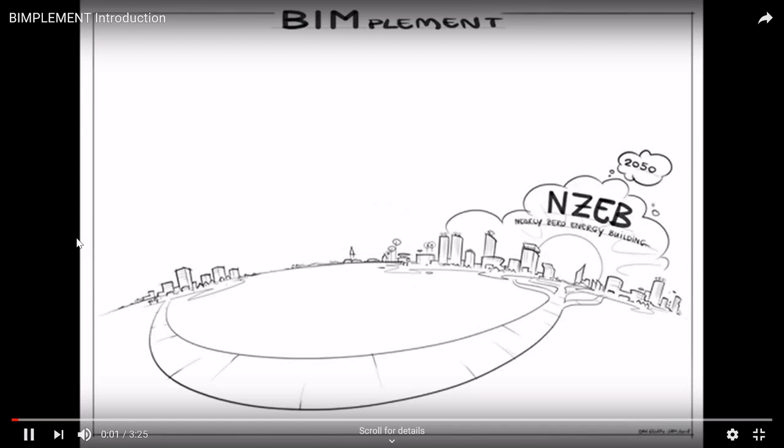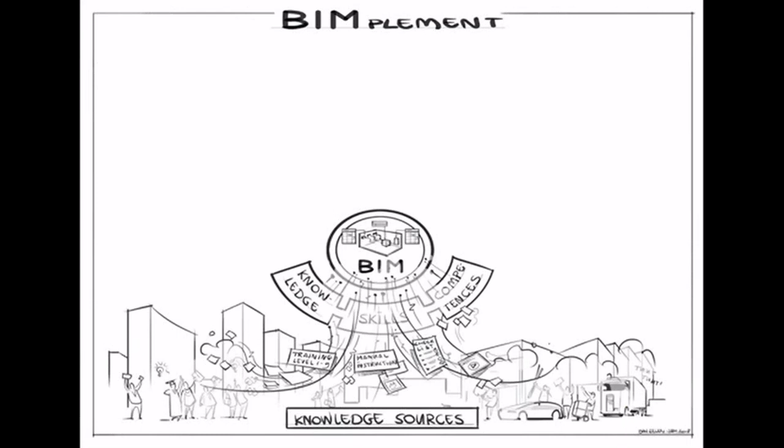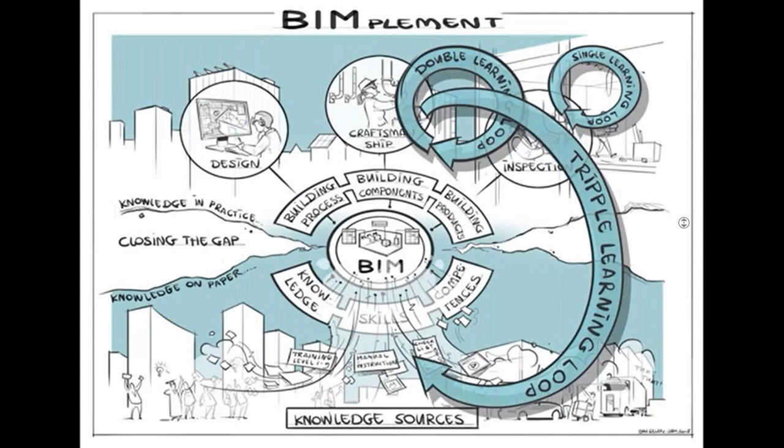Construction. Hands-on training using BIM-enhanced learning tools in the workplace. Quality control throughout the construction and renovation process. It uses BIM as a universal information holder and enabler of the learning process within projects. The learning process can be developed from several knowledge sources, such as training, inspections, entry information, guides, and so on. These sources can be qualified in the knowledge, skills, and competencies needed to deliver guidelines, inspection formats, checklists, instructions, and so on to workers on site. The use of BIMplement will lead to single learning loops on site, to double learning loops between sites and between different professions, and to triple learning loops on site through feedback from the construction site and knowledge providers. BIMplement works on closing the gap between knowledge and application. The simple use of knowledge can be achieved by BIMplement qualifications. The first step in BIMplement was the training methodology being implemented, tested, and improved. BIMplement has already trained a group of BIM coaches. At the national and regional level, they are responsible for seeding the network and finding suitable experimental sites where elements from BIMplement will be applied. At experimental sites, several groups of workplace coaches are being trained. They are our partners in the implementation of BIMplement.

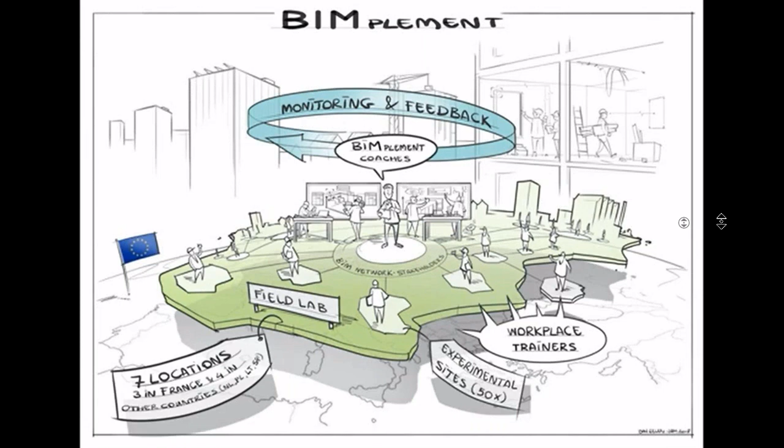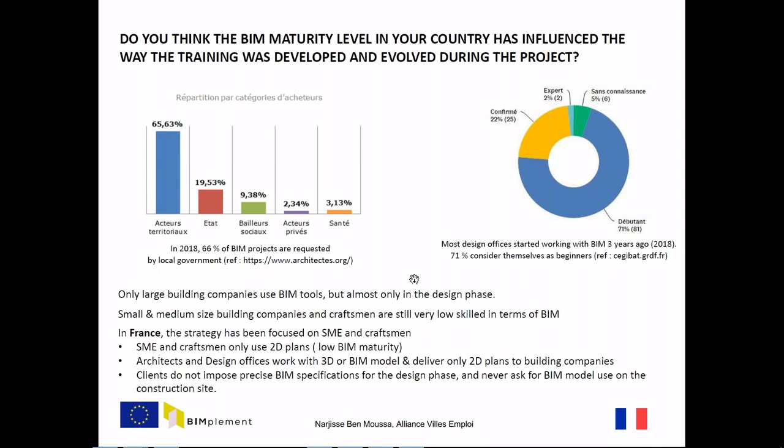So starting from this general observation, could you please go to the next? Yes, thank you. No, the first, the scheme, please. Sorry, I'm trying. Just one more. Yeah, you need to go one more. There you go. Perfect. Sorry. No worries. It's taking a little bit of time to change the slides. We need to go one up? Yes, please.

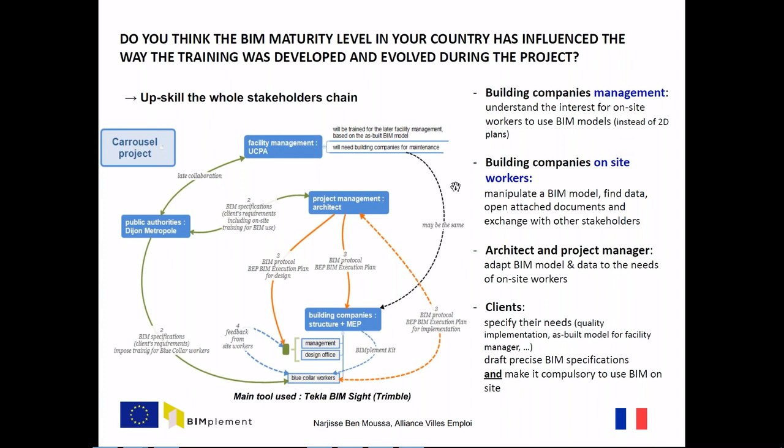Okay. I'm Vaidotas Šarkinas. I will introduce myself before the slides appear. I'm from Lithuania, from the Lithuanian Builders Association and Digital Construction Organization, which is grouping 13 Lithuanian construction sector associations for developing BIM methodology in Lithuania.

Okay, so to answer the question, yes, of course, the existing situation at national level has influence on the project training, the developments, and also we have some proposals for development of the BIMplement project model. So within Lithuania, BIMplement comes to an existing situation that we already have.

And we call this the BIM evolution or revolution in Lithuania, as we started in 2006 from a simple question regarding classification from one company, and then we continued with an investigation of what is going on with BIM implementation in other countries. Then we started organizing the digital construction conferences in 2012. Then we established the organization in 2014. Then we started arranging BIM awards from 2016, so already 5 years in a row.

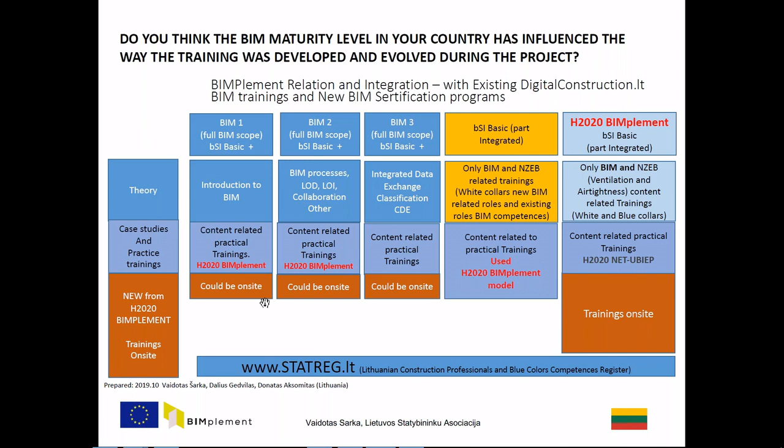Yes, continue, please. It will take time. Yeah, and the last slide presents what we are using now, already taken from BIMplement as a result: one of the project models as a demo model in existing training models. It means within BIM 1, BIM 2, and in the next stage we will implement this model in BIM 3

trainings. So you see here digital construction BIM methodology, plus NZEB and BIM scope, plus the BIM quality topic, plus common data environment implementation, and the training on site model that we have already implemented in our market. Yeah, thank you.

Okay, thank you. Now we will hear from Piotr Dymarski, he is our Polish partner.

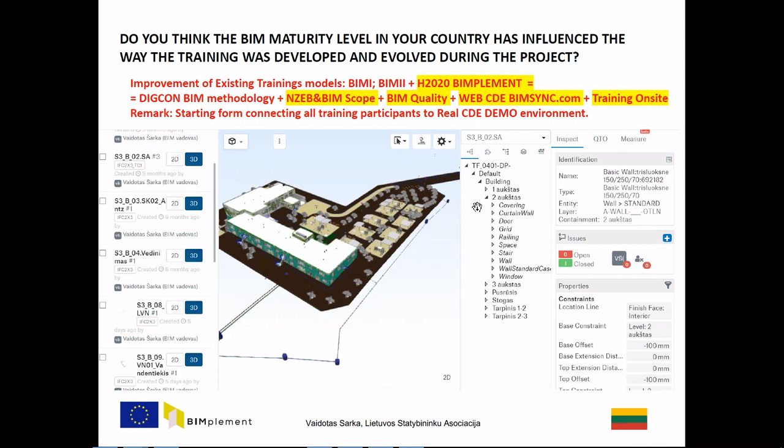Hello, my name is Piotr Dymarski and I'm a BIM coordinator in a construction company in Poland called Mostostal. I'm also a member of one of the partners of the BIMplement project. So regarding the first question, I would like to inform that generally the BIM maturity level in Poland is low. There are no legal regulations in our country, and I think that we will have to wait 2 years for them.

Investors are starting to discover the benefits of BIM. However, as BIM is becoming fashionable, they prepare requirements that are very extreme, from very general to very demanding. And in both cases, this is a problem for the general contractor from the beginning. Investors are not fully aware of the benefits of using BIM technology, and they don't know how to use BIM after the completion of the projects. And unfortunately, they don't want to pay for BIM.

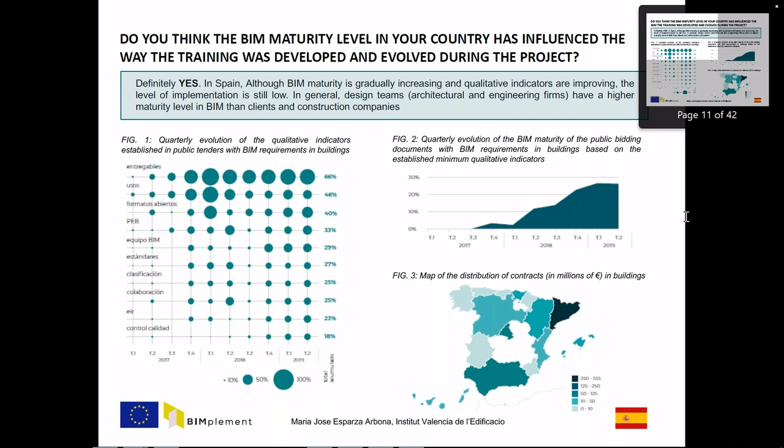So in Spain, an awareness campaign was held in which more than 150 professionals participated and filled out a questionnaire. The results of these questionnaires and the conclusions of the different meetings with key agents in the region laid the basis for the content index of the trainings to be held. Next slide.

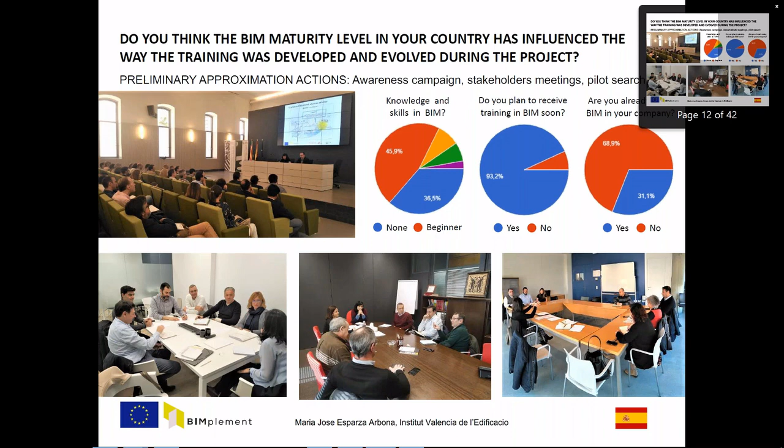In general, design teams have a higher maturity level in BIM than customers and construction companies. As our trainings were aimed mainly at workers in construction companies, it was decided to create an introductory course with basic concepts that are commonly used in the construction phase, such as planning and measurements. At the moment, trainings have been arranged for 3 construction companies: Bexa, Obremo, and Clásica Urbana.

And it's important to take into account that many times the BIM models received by contractors really are not ready to be used in the construction stage. So there is a gap between the design stakeholders and the contractors, mainly because they are involved in the project in different stages. So that's an important issue too. And that's all from our side.

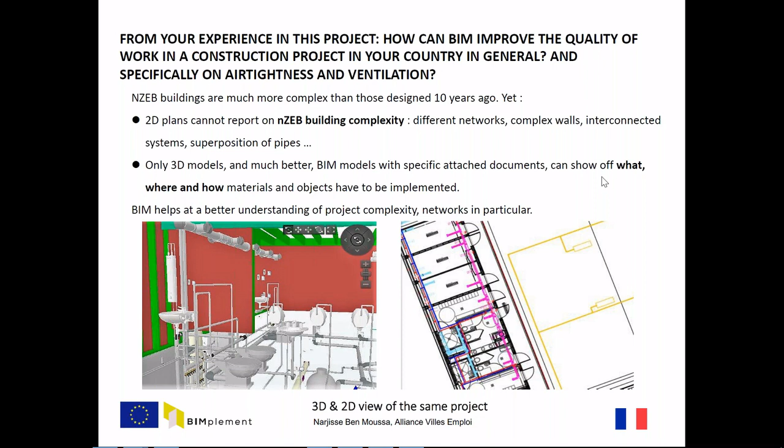What BIM models make possible is that we can see and visualize the whole system that has to be implemented. For instance, here a ventilation system, including ventilators, ducts, pipe tees, and elbows. BIM also allows us to check each element and get its properties. It helps us place each element within its local context: walls, partitions, other networks, false ceiling. So we can have a scheme of the ventilation system without the walls and also with the walls, so we have very concrete technical specifications of each part of the building.

As I was saying, we place each element in the context, and we can also check the compatibility of the design with what has to be implemented, especially with different groups of professionals.

We can place each element in the room through IFC space where it has to be implemented. We can verify the blockouts, that the blockouts are very well placed in the right place, which is very, very important here. And also we can find out what are the conditions for these holes to be treated in a proper way to guarantee a good air tightness.

So in all this, the BIM model can help us avoid a lot of errors and a lot of unnecessary holes or not proper or adequate implementation of the whole building. I think that's it for me.

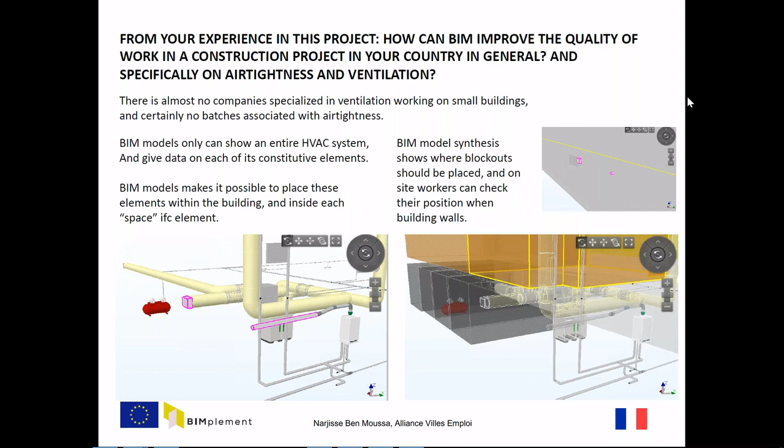Okay, thank you. Piotr, please. Hello.

I want to respond to this question from the general constructor perspective. So the quality can be improved in two ways. First of all, it's very important to focus on collisions management at the design stage. As designers and architects are not always familiar with all BIM tools, we decided to use the BIM Track platform in one of our demo sites. These platforms allow you to manage all collisions and assign responsible people for solving all problems to have

collision-free design projects. As I said, as not all partners were familiar with this tool, we prepared training for them to explain how this kind of platform works. For the constructor, this has very good benefits. The principal benefit is that in one place you have control of new problems or new issues, ongoing working issues and issues resolved.

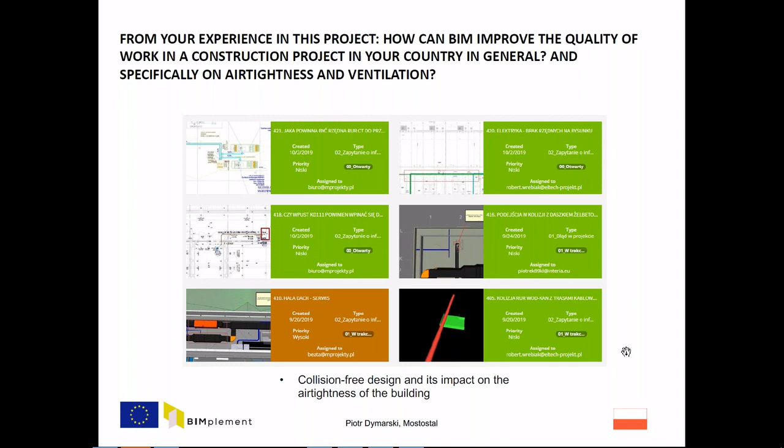For people who are not familiar with the word issue, it means that on the construction site we use this word to describe problems that have to be resolved. Next. And regarding the execution phase, to improve the quality, we have to control all problems in time and the way of solving them. In Poland, construction companies in many cases use a lot of subcontractors. So we have to control the quality of their work.

And we decided to implement a tool called Dalux Field to manage all issues, all problems that appear during the execution phase. The advantage of this tool is the fact that it's very easy to use and has a simple BIM model viewer. Next.

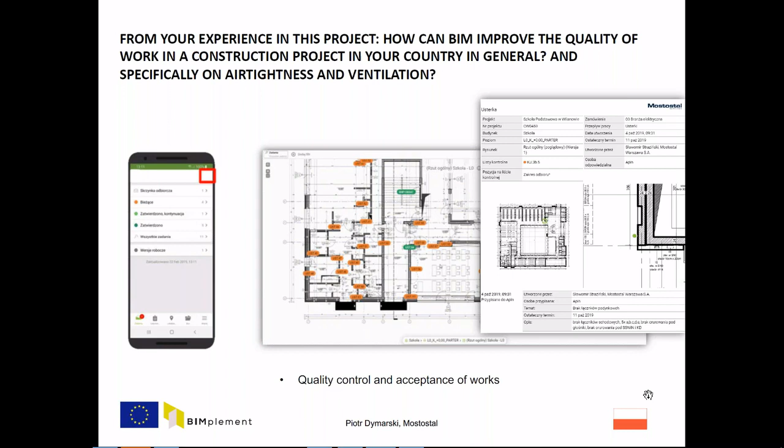We also use this tool to prepare quality reports. These reports we transform from Excel sheets into digital forms that are easy to fill by construction workers, as they are always available on the platform. You can use them on tablets or phones. Our workers have access to these forms all the time, and this is also the reason that they fill these forms regularly and in real time. Thank you.

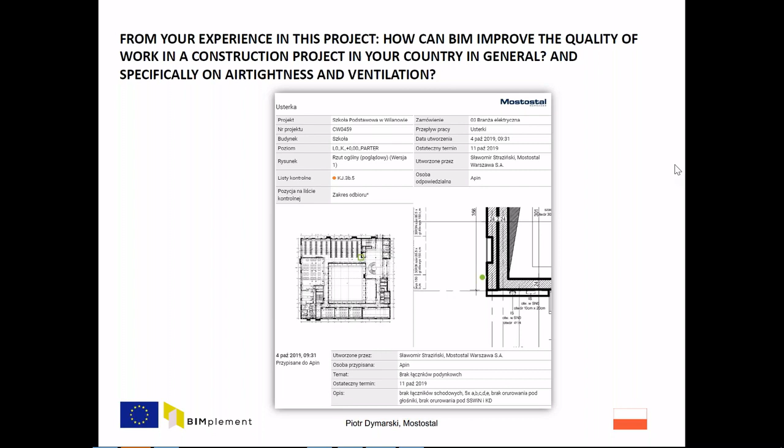Thank you, Piotr. So now we go to Maria José, please.

Hello again. In Spain, the evolution of new technologies is leading the construction sector to a new revolution in the way of working, especially in the collaboration among the agents involved in the different construction processes. So the situation is radically transformed with the appearance of BIM, providing a new collaborative work methodology for the construction sector. Working in BIM means having a single model from which to generate and manage all the project information throughout its entire life cycle.

Architecture, engineering, and construction professionals have a methodology that allows them to operate together in real time. Any change or information introduced in the model modifies the set of affected elements automatically. For example, by introducing the air conditioning ducts into the model, the system checks their possible interference with the structure, partitions, or other installations. Another added value of BIM technology is the possibility to define the elements that make up the building. It is possible to define its properties and characteristics, thermal, acoustic, environmental footprint, obtain product certifications, or specify the technical conditions for proper execution or maintenance.

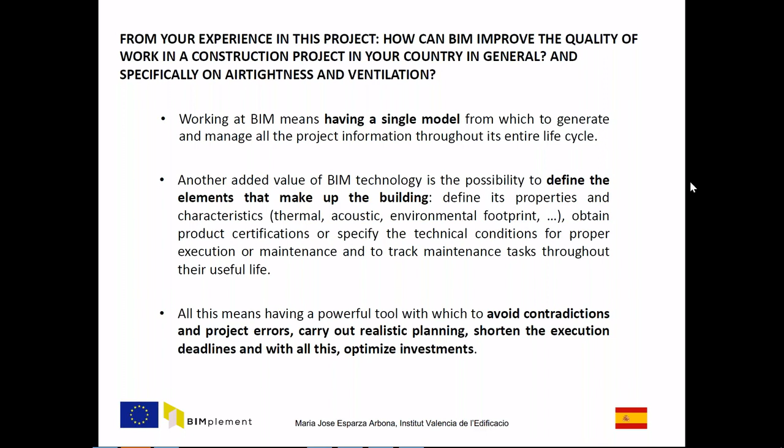From our experience in this project, BIM definitely can improve the quality of work in construction projects. In general, I think the talks of the other countries already spoke a lot of it. I would like to go especially to air tightness and ventilation. And what we found out is that the devil is in the details.

By enriching the BIM model and being able to provide both flat 2D details with specific information on the water tightness, on the air tightness and things like that, including a possibility to show the 3D view of the model on a BIM viewer on your mobile phone, that works very powerful to give the blue collar workers exactly the information they need, for example, to realize the air tightness as it is detailed out in the model.

When it comes to empowering quality assurance, we have done a lot of work within BIMplement creating qualifications, describing the knowledge, the skills and the competences needed to deliver a high quality job. And what we found out regarding this is that it is possible to connect that information to the BIM model, so that in the future you can query the BIM model, for example, what kind of staffing in blue collar workers do I need to realize a high quality job when you are going to realize this model in reality.

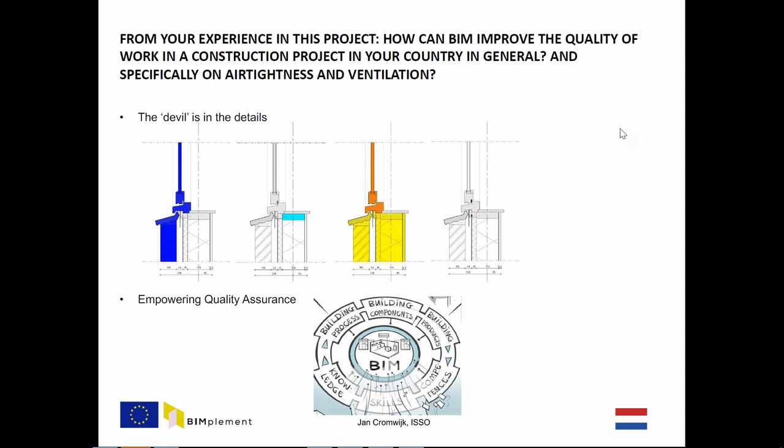So the question is, is everyone using some software of Trimble, Tekla, or so? Marion, could you reply to this one?

Yes. In fact, what we presented in the slide is the basics of what we try to explain to the participants in the training session. What we want is to have everybody be able to manipulate a viewer, to visualize correctly the job they've got to do or the way they have to present the job. And in fact, we do use very often Tekla BIMsight because it's an easy viewer which has quite many tools, such as a possibility to use the album down under the model, where you can make the list of all the weak points, which we will see in the third part of the presentation.

With Tekla it's also possible to add documents, to make notes, to exchange, even if we don't use the same type of collaborative platform. So, yes, in fact, we do use as a basis Tekla BIMsight, and then depending on the level of the person we are working with, and usually they don't want to invest into a real software, we just use different types of freeware viewers to be able to get some other additional tools. Did I answer? Okay, yes.

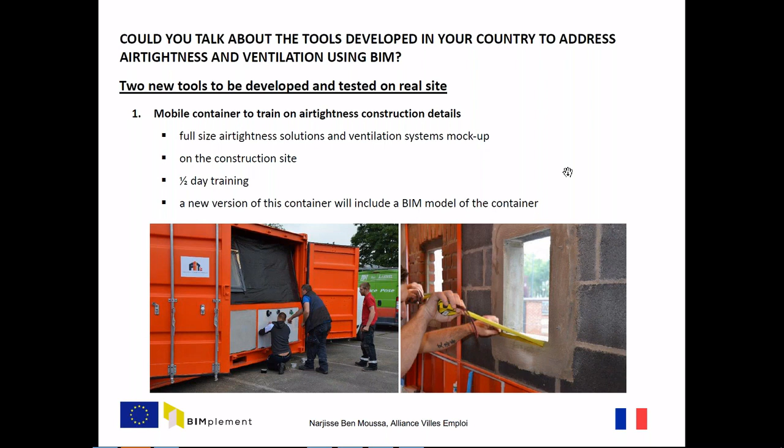In addition to improving blue-collar workers' practice, the container will also train them to use a BIM model, first of the container, and then afterwards for a real project. The idea is also to make blue-collar workers able to find out where in the building the solutions they learned are being implemented, meaning they learn solutions and then figure out where in the building they're going to implement that, finding additional explanations and documents linked to the BIM model. As you see in the two pictures, the big container and the workers are doing their training on the container.

For the next slide, we are talking about an air-tightness BIM model built from a real site model. This second original tool is meant for air-tightness issues that are more difficult to answer, because there are many solutions per project—not a standard problem with a standard solution, but different problems, different solutions, different projects. So the proposal is to create an air-tightness BIM model extracted from the original BIM model that shows only the weak points related to the issue. We're talking about complicated points, weak points, which we treat and give corresponding solutions for.

Each weak point in the project—like doors, holes for pipes or chimneys, the roof-wall joint, etc.—will be worked out with the project manager and specialized industrial companies to propose a solution in terms of material, instruction guide, detail, etc. This solution will be attached to the BIM model, as we can see in the two pictures here.

They will be attached to the BIM model as technical documents on product, technical details, schematics, video explaining the implementation, etc. All on-site blue-collar workers will have access to these documents through the viewer. Here we have a weak point, we can access a video, and then access a technical sheet. In this particular view, you see three attached documents: the video showing how to use a special pump of insulation, and a technical schematic showing the generic treatment of a weak point in joinery.

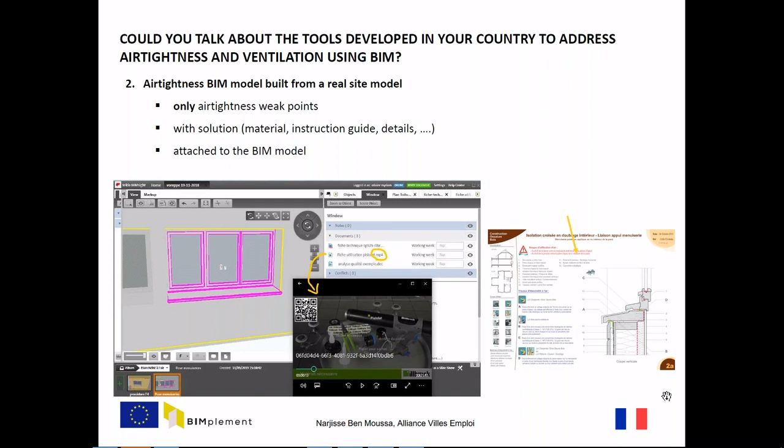Yes, so I would start from the scope of our tools, and I would call some tools soft. It means more related with quality assurance within the process part and information management.

So within our case, we're starting from the methodology part. It's digitalconstruction.lt, where we put and train regarding this methodology in our market. The next is statybos taisyklės, construction rules, quality check descriptions, quality checks, and competencies requirements related with energy efficiency systems and elements, also air tightness and ventilation. Next is BIM classification, BIM information classification part.

It's BIM Axon, where we are developing, starting from development of BIM processes till model systems and elements and other stuff. Also, next is the digital construction competencies register, StatTrack, where we are collecting, already starting to collect the competences, trainings about our market.

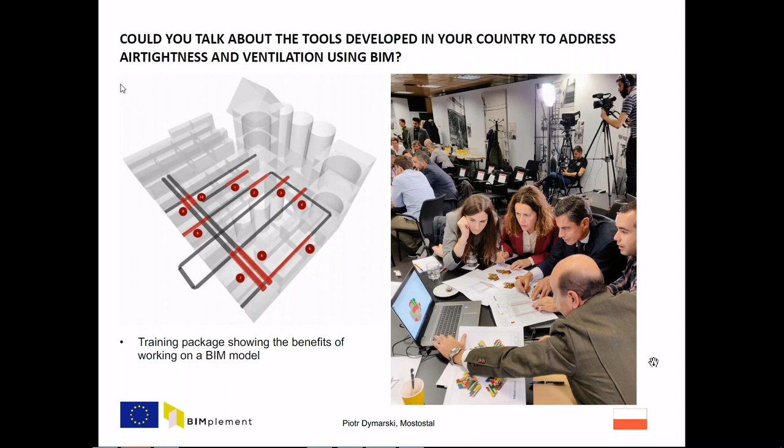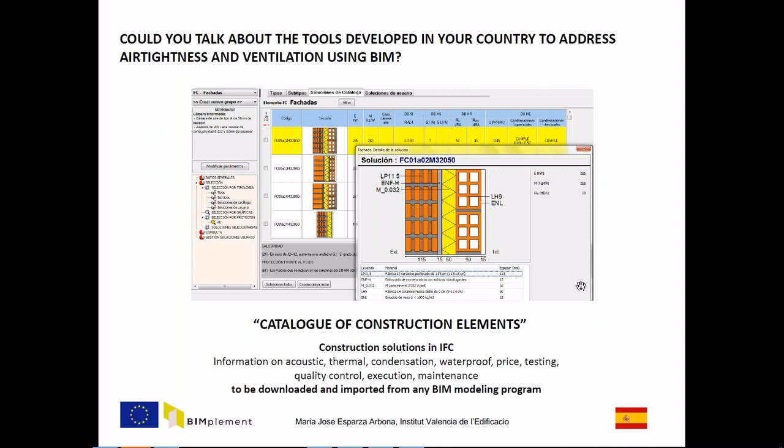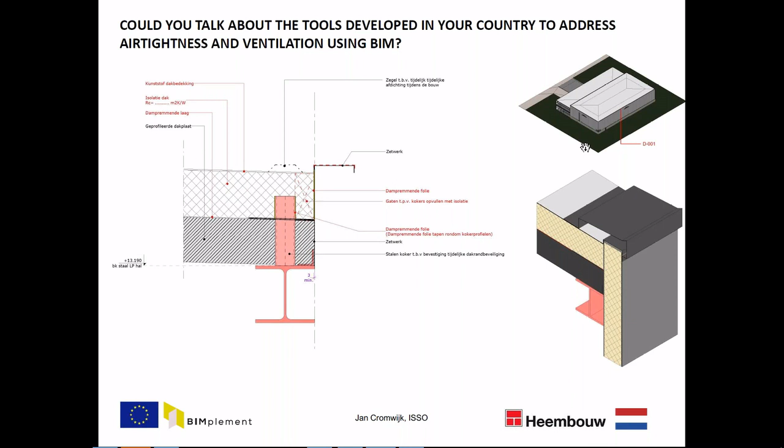Okay, thank you. So this is the end of the third round, the last round, and we open the floor for questions. If you have any questions, please just type it in the question box. So far, no questions.

Yes, one question. One question for the Netherlands. Talking about the efficiency in exchanging information between stakeholders, what BIM information will be expected from the manufacturers? And at what level? How far do manufacturers have to do BIM? That's the question. Jan, please.

Yeah, thanks for the question. It's not an easy one because we found out that when working with blue-collar workers, it's very nice to have a high level of detail in the BIM model. So yes, manufacturers can provide the value chain within the building and installation sector with high quality and a high level of detail in their BIM models together with the products.